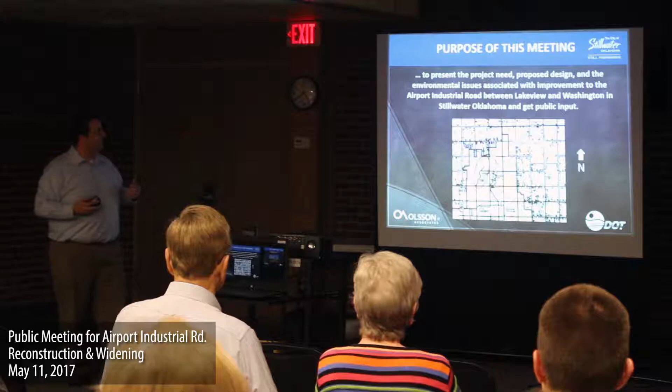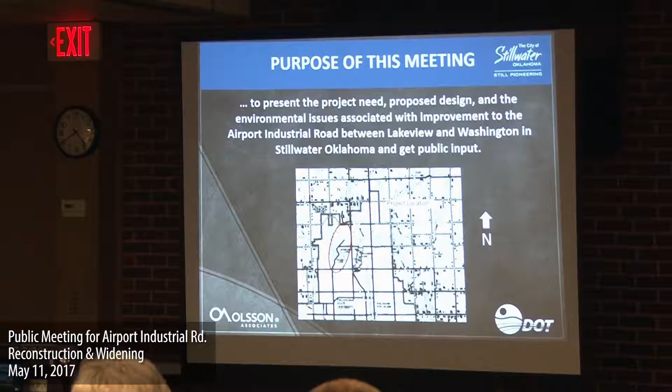I'll go ahead and get us started. This is the public meeting for the Airport Industrial Road Reconstruction and Widening. The purpose of the meeting is to present the project need, the proposed design, and the environmental issues associated with the improvements. Airport Industrial Road extends from Lakeview up around the airport to Washington, and the purpose of the meeting is to get your input on this project.

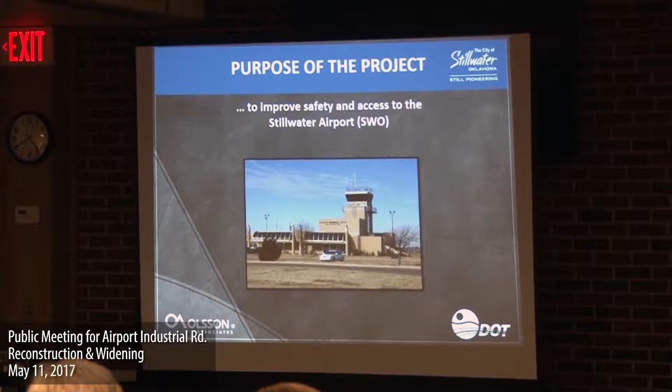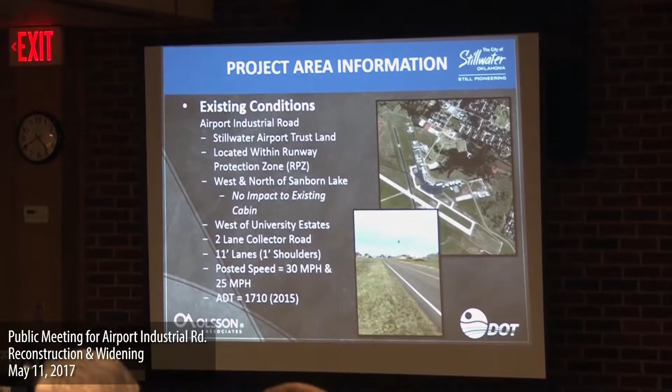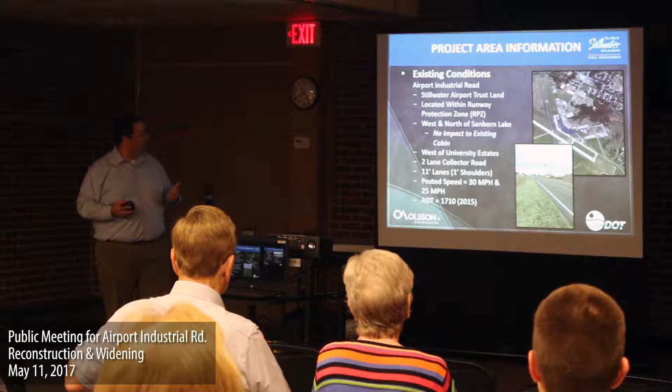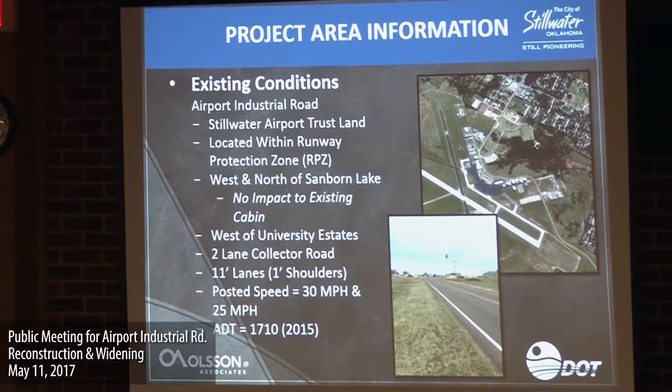The purpose of the project itself is to improve the safety and access to the airport. Some of the existing conditions: the project alignment, the roadway, is all located within the Stillwater Airport Trust land. The south part of the road is actually located within the runway protection zone, the RPZ, of the runway itself. It's located west and north of Sanborn Lake - there's no impact to the cabin at all as part of this project. Also west of the University Estates neighborhood.

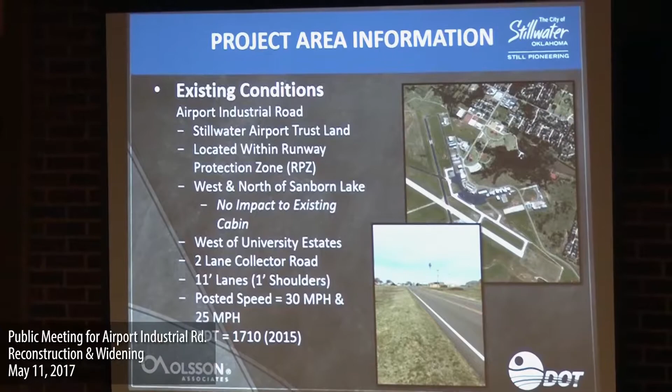It's a 2-lane road. Existing roads are 11-foot lanes with about 1 foot of shoulder on either side. Posted speed anywhere from 30 to 25 miles per hour, with average daily traffic in 2015 measured to be about 1,700 vehicles per day.

Some of the deficiencies of the existing road include sharp curves. Past accidents have necessitated the guardrail that exists out there today. There's pedestrian access to the airport - pedestrians parking, pedestrians walking across this roadway - and then limited parking for the airport itself.

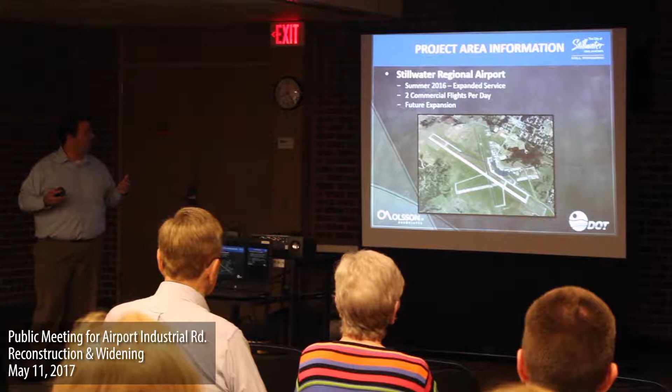The airport, with the expanded service that happened in summer of 2016, the 2 commercial flights per day, has generated more traffic along this corridor, and also there's a plan for future expansion of the airport itself.

And with that, I'm going to let Jennifer talk about some of the environmental constraints associated with this project. Great, thank you Russell.

Now please keep in mind, when we're talking about NEPA, the National Environmental Policy Act, this is an entire course at OSU, and I'm only going to talk about this for maybe 5-10 minutes at the most to keep it as brief as possible. But briefly, as you can read here, NEPA's purpose is to balance the economic, social, and environmental impacts on a proposed project. NEPA is only used for federally funded projects that have to go through this process. For this project, that would be the Federal Highway Administration. So we go through their NEPA process - a lot of different federal agencies have their own NEPA processes they go through. But really what we're trying to do is identify potential impacts and try to avoid them, minimize those, and if we can't do that, then mitigate those potential impacts. Oh, I went the wrong way.

Just very briefly, some of the major components of the NEPA process is engaging the public, which is why we're here tonight. I know there are comment cards in the back, and I really do encourage you to fill those out and provide them to us tonight or send them in to the city so we can get your comments.

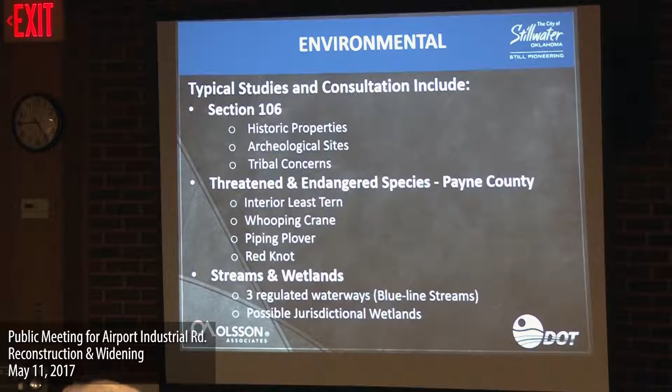We also look for endangered species, and we coordinate with the Fish and Wildlife Service. For Payne County and this area, I don't think we'll have any significant issues with endangered species.

One of the bigger ones would be the streams and wetlands. We have identified some wetlands out here, and we do have several stream crossings.

Another thing we like to look at, because it can be a cost issue during construction, is potential hazardous waste sites. There are a couple potential issues in this project area. One is lead contamination from a former shooting range. Apparently that has been cleaned up by DEQ, but that's something we're going to get further information on.

And then the other thing is the possibility that there was a former landfill out in this area somewhere that we're doing the study on.

We also look at things like relocations and prime farmland. I'm just listing some of the other issues that we typically look at. One of the bigger ones citizens might be worried about would be noise impacts. So if we add capacity to a highway and go from 2 to 4 lanes, we will be doing a noise study once we identify the preferred alignment for this project.

Now I'm going to talk about the two fun ones for this project. The first being Section 4(f). That's a DOT law that says if you're using federal funds, they really don't want you to go into lands that are historic, that are parks, refuges, or basic recreational facilities. Obviously out here we have the existing Sanborn Lake Park and Sports Complex and your recreational facility.

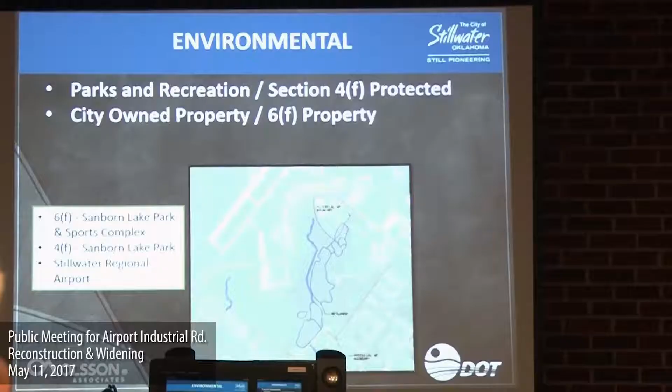Okay, here's the map, which you'll see in a minute. You guys live here, so you probably know where the ballpark is. The city owns the majority of the undeveloped parcel, and they're going through a process now of trying to determine what they'll consider recreational use versus land owned by the airport, which is also owned by the city. We're still trying to get that final determination from the city.

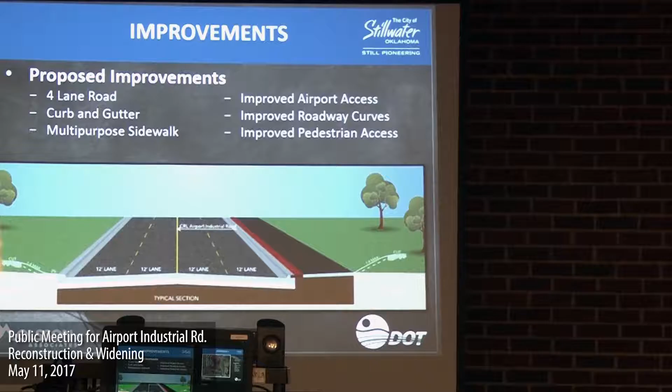So I'm going to talk a little bit about the improvements that are planned. What's being planned for this new alignment for the arterial road is a 4-lane road with curb and gutter. In addition, it will have a multi-purpose sidewalk, one of the wide sidewalks that have been going across town in lots of places, located predominantly on the east side.

That's to improve the airport access and improve the roadway curves. Can't be on the east side - that road runs east and west, so it has to be on the north or the south. East and south, yeah. Okay, south we got. For improving the airport access, improving the roadway curves, and improving the pedestrian access.

So what we've done is develop several different alternatives. We'll walk through the alternatives that we've developed and then how we got to the preferred alignment.

The first alternative we looked at was staying on the existing alignment as much as possible. Basically the same alignment as what's there, except it's a 4-lane road. The main difference is in the area around the airport - this was a one-way operation that could be looped. The advantage was the least amount of impact to the ball fields and park area. The disadvantage was it didn't really help safety from improving the curves, and one-way operations aren't as common. It doesn't separate the through traffic from the airport traffic, so for a lot of reasons this one wasn't chosen.

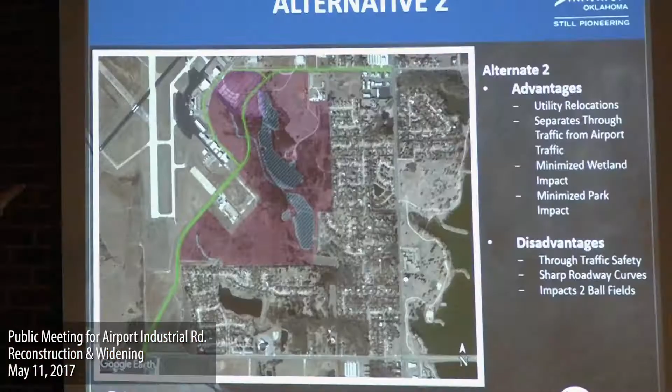So from this alternate we developed a second alternate. I'll flip back and forth so you can see the difference. This green alignment takes the through road and separates it from the airport traffic, so the through traffic is now separated from the airport. This improves safety.

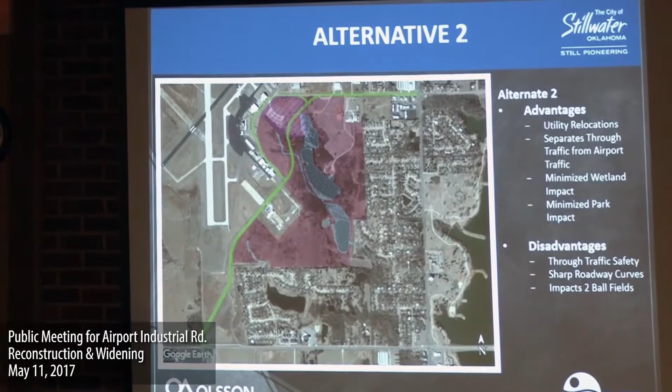The disadvantage of this is it impacts 2 of the ball fields. These ball fields are the ones that use the 6F money Jennifer spoke about earlier - those 3 ball fields are under that fund. The blue crosshatch areas have been identified as possible wetlands, which the NEPA studies would delineate. This alignment moved the through traffic further from the airport, but tried to stay out of the wetland impact and further from the park. This was the second alternate.

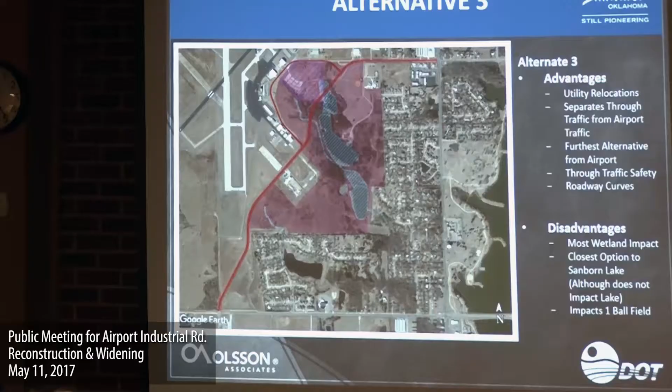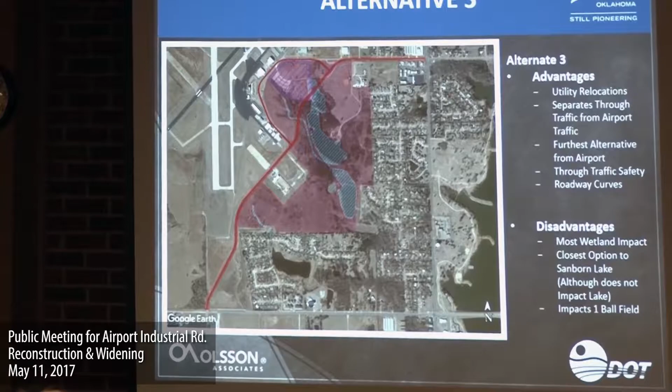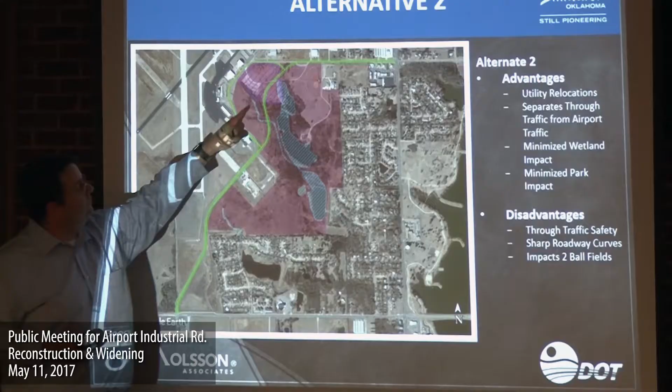The third alternate tries to get further away from the ball fields. To the south and east it's pretty much the same, but this alternate moves further away from the airport while now starting to impact some of the wetland area. An advantage is we're only touching one of the 3 ball fields. It still separates the through traffic from the airport traffic, increasing safety. Between alternates 2 and 3, you can see these curves are still fairly tight in alternate 2, but in alternate 3 those curves are flattened out, making for gentler curves driving through the alignment.

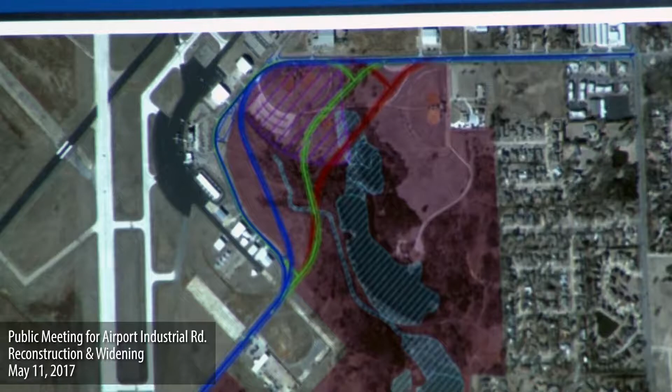You can tell how we migrated from the airport to go as far out as we could. We had a meeting back in late fall, early winter, with the city, with ODOT, and us, the airport, and really went through a lot of these alignments, looking at pros and cons of each one. And from that meeting, another alternate came about.

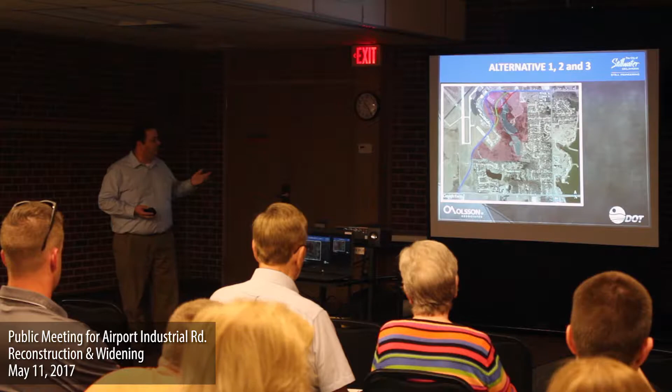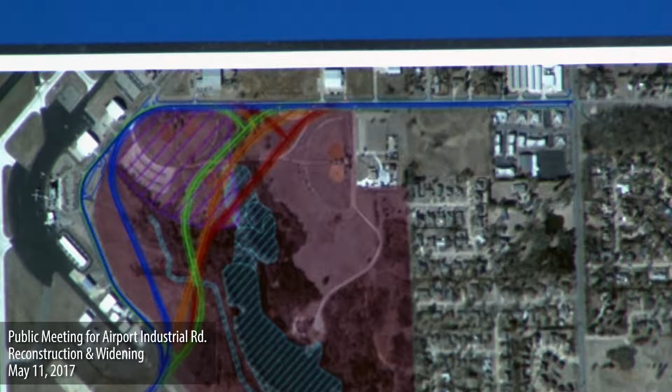We've called that alternate 3A, and that's the orange alignment you'll see here on the boards. It's in orange, I know it's difficult to see back there. But basically it runs right in here and almost splits, is almost the average of alternate 2 and alternate 3.

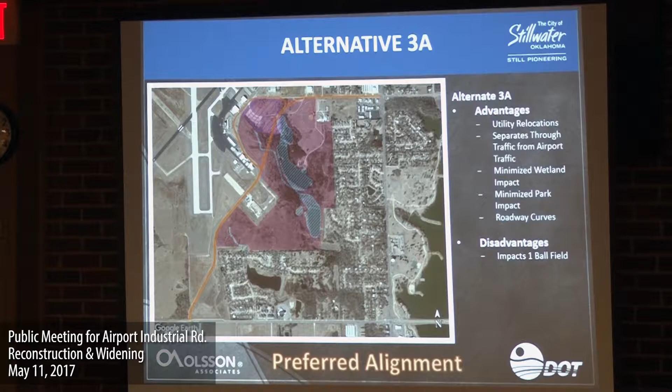So with alternate 3A, the advantages were it still separates the through traffic just coming from Washington to Lakeview from the airport traffic, improving the safety of the pedestrians of the airport. It still minimizes the impact to the wetlands. It also only impacted one of the ball fields. Now that's an advantage and also shown as a disadvantage because we're still impacting one of the ball fields, but as far as the severity of the impact, it's a little bit of both.

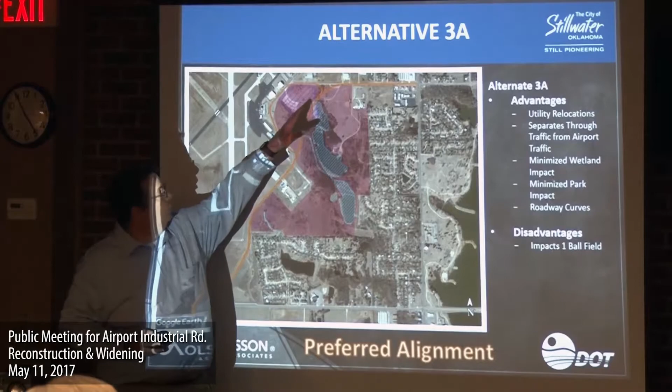And then it improved the roadway curves, so this was a much smoother curve coming around. From a standpoint of traffic moving, it was a safer alternate. So this really became the preferred alternate that is being put to move forward for the NEPA studies.

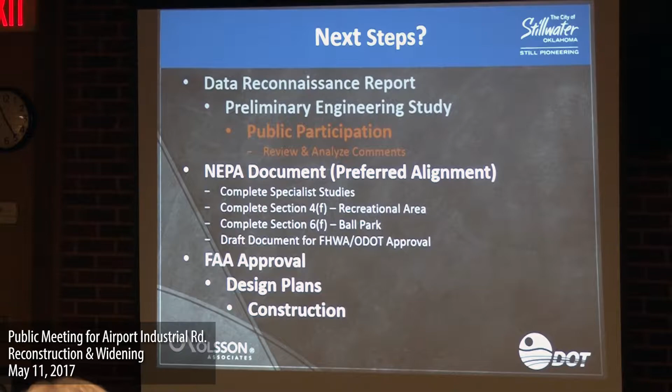So where we're at today, we've done the data reconnaissance report, and the study to get to this meeting. Today we're at the public participation stage, where we want your comments on what has been done so we can find out if there are more things we need to know about. What are your comments? What do you like, what do you not like? We want to hear both.

From this meeting, we'll receive comments over about a 2-week period. Those comments will then be incorporated into design so we can move forward with getting the right alignment for the study. The next phase is the NEPA project on the preferred alignment. There will be an FAA approval since the south part of the project goes through the runway protection zone. Then design plans and construction, though those are still to be determined.

So we definitely want your comments. We want to know what you have to say about the corridor. If you have concerns, I know there's some about sound, lights, and noise, please make those comments so they're recorded as part of this process, and let us know so we're aware. There are a few different ways to leave comments: you can leave them here tonight with us, or if you want time to think it over, you can mail them to the City of Stillwater, or email comments to Glenda at the City of Stillwater.